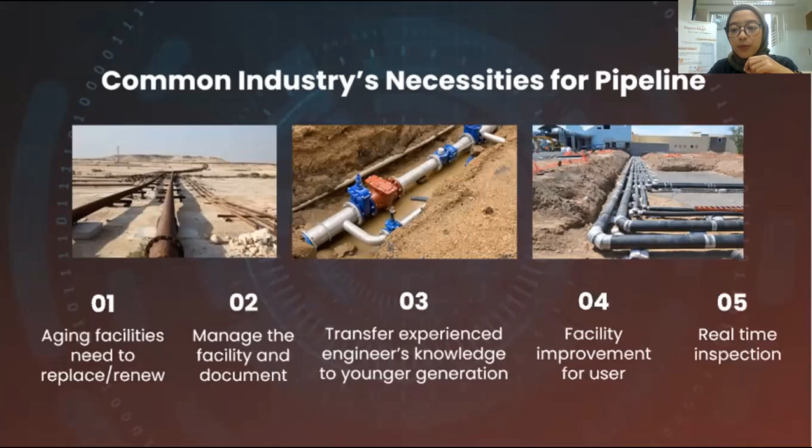The third one, there's regeneration for every company, of course. We need a platform that could make sure the experienced engineers' knowledge is well delivered to the younger generation. And then facility improvement for users. The last one is real-time inspection for mitigation and to avoid worse accidents.

Following up on the previous necessities and issues encountered by users, SuperMap provides four concepts as pipeline management solutions. GIS will not replace oil and gas software, never. But by trying to solve the issues that emerge using spatial approaches, we believe we can offer these solutions.

The first one is facility data management, emergency situation analysis, 2D and 3D integration, and the last one is pipe modeling and analysis.

And who can utilize this solution? As long as the industry has pipes to manage and analyze, they need this solution - such as the oil and gas industry, telecommunication, water supply, and many more. Now let's discuss one by one the solutions I mentioned before.

So the first one is facility data management. The data here means data that has spatial information, consisting of position, coordinate system, and attribute information. Tabular data is not really convenient for analysis, especially for spatial analysis. By mapping them and overlaying with an informative base map, we can achieve not only data management, but also insights into their distribution, scale, and relative position to each other. Moreover, visualizing them in 3D makes it way more convenient.

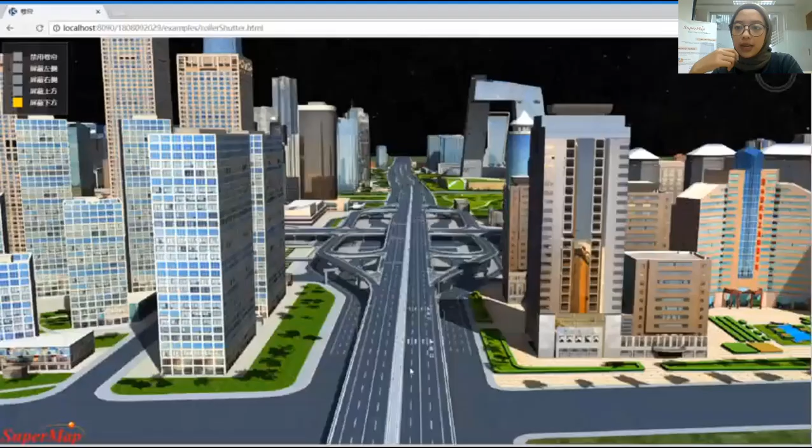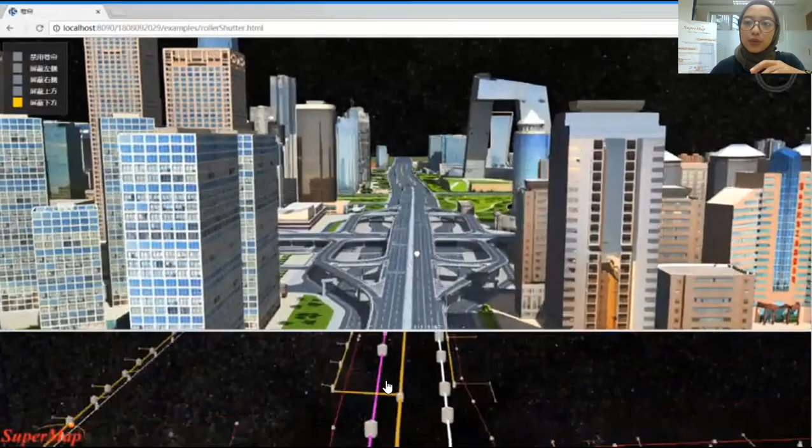This one shows more detail on the example of data integration. We are trying to bring 3D data from desktop application into web-based application, and also integrate the underground data and above-ground data together, as presented here. So we can know what objects are above the pipeline. Let's say later on, if we are going to build a new building, we can check first what pipes are located under the planned building area.

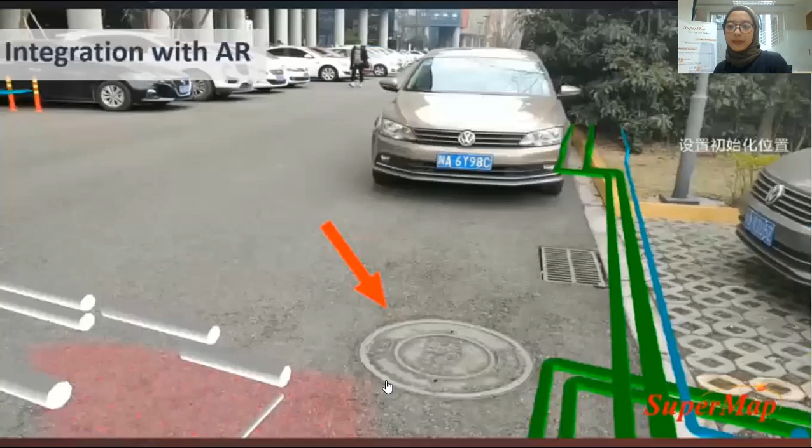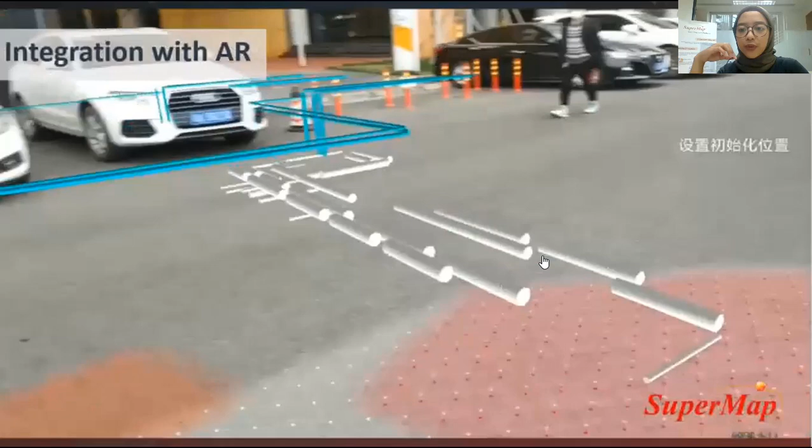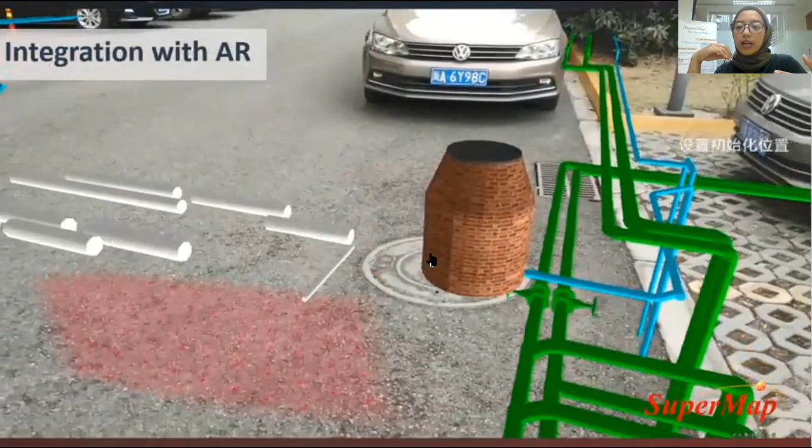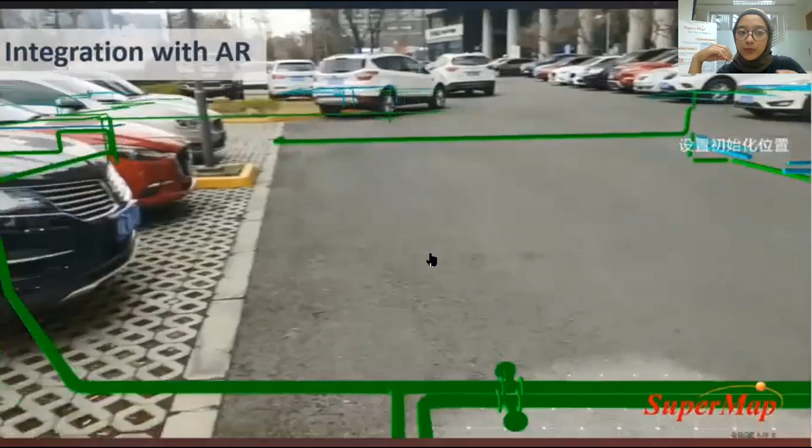Another thing is AR, or augmented reality, for a way better user experience. Pipes are mostly, or maybe all, located underground. Sometimes staff need to do an inspection for a certain pipe, but digging the soil to find it is not convenient and not effective. AR that overlays digital and real objects, as presented here, will allow you to know where the pipe is located. But we need to set the scale of each object so we can make sure the position and size of the object is similar, or quite similar, to the real object.

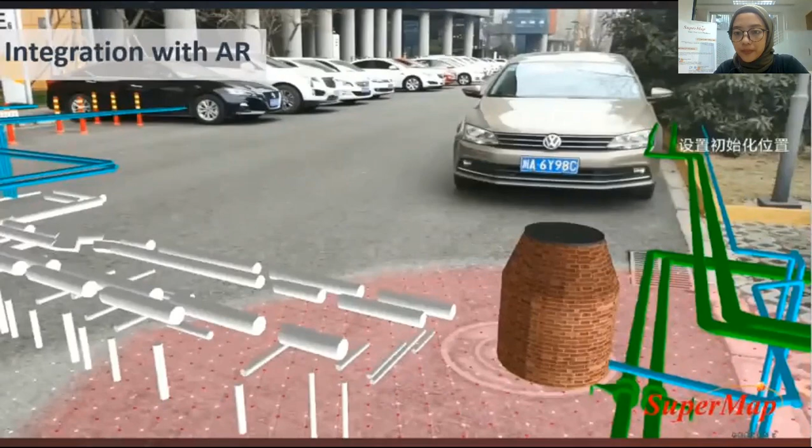So we have discussed facility data management, emergency situation analysis, and 2D and 3D integration in SuperMap pipeline management solution. For the last part, pipe modeling and analysis, I will show you a live demonstration on how to achieve this in SuperMap desktop application, or what we call SuperMap iDesktop.

And this is not limited to desktop - we can bring the analysis to web-based applications as well. So in case you may need to develop a new platform or application on another terminal, not desktop, you can bring the analysis and do further development to achieve that pipeline management or pipeline analysis application.

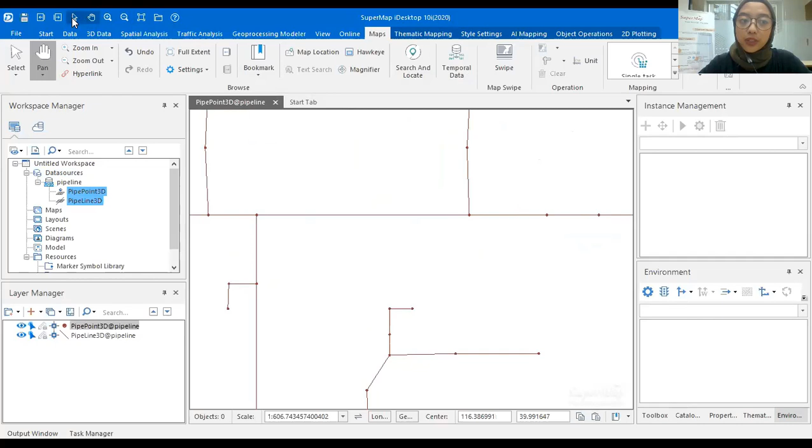So one line, or we call it one edge, such as this one, will have nodes at each end of the line. This node, and also this node, will be very useful for us to detect the flow or the direction of the pipeline. Later on we will analyze the network based on the direction of the pipeline.

So we need to construct a network first, otherwise we will not be able to do further analysis for the pipeline. In the beginning we need to create a new network data set from our data.

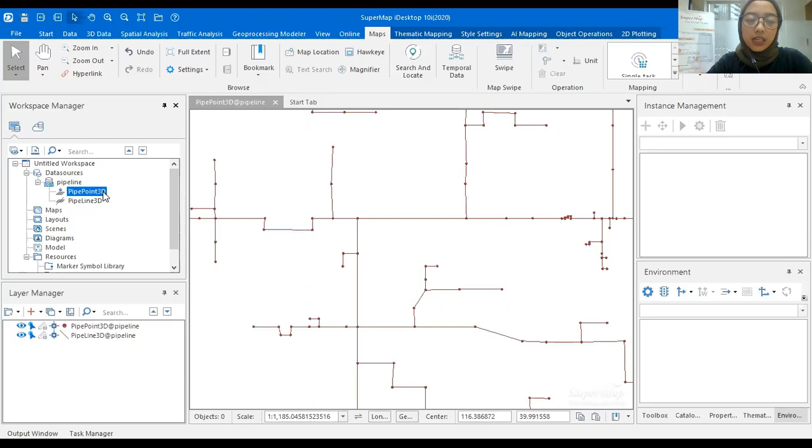Before that, I want to show you the attribute table of each data. For example, this PipePoint3D is for the valve, or the node data. It has a rotation field XYZ, then symbol ID, and also scale number XYZ.

This information will be very useful for us to style the valve, to style the node in the end. As you see here, the symbol ID has some numbers, right? Actually it corresponds with our library of pipe points.

Maybe I will show you here in the SuperMap resources. You can check the marker symbol library, go to 3D symbol, and here in the pipe points, every point symbol has a different ID from each other. This one has ID 54437, and this one is 54454.

So by taking advantage of the symbol ID information, the symbol ID field stored in the PipePoint3D, we can style the valve, we can change the style of the node referring to the symbol ID to make it look like this.

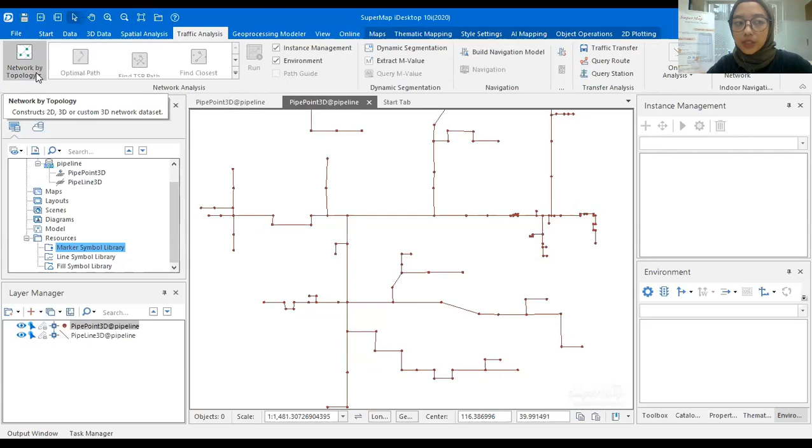Okay, first we can go to the spatial analysis, and there is a structure network tools. Sorry, it should be in the traffic analysis because we are going to create a 3D network. So there is a network by topology, and we can click in the structure 3D network.

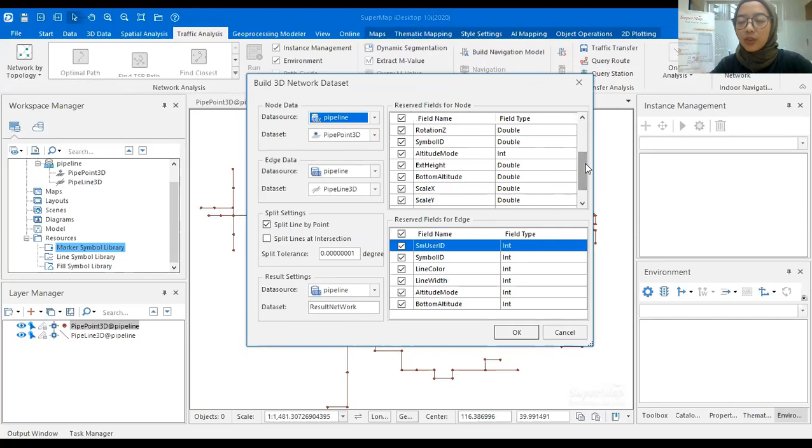Now you will be asked to define the node data and the edge data. In the node data, it should be PipePoint3D, and in the edge data it will be pipeline 3D as well. You can also change the reserved fields for both the node and the edge. If you have other requirements to store or reserve certain fields, you can do further settings there, and also change the directory path for the result and the default data set name, then click OK.

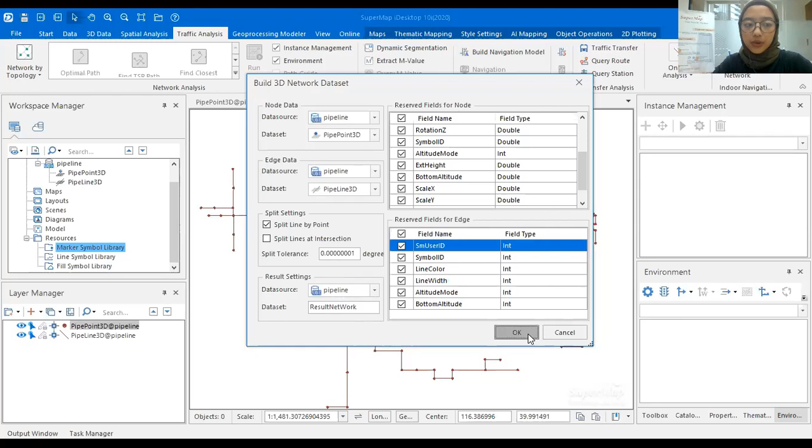As the process finishes, we get two different data sets. The first one is the line data set, and the second one is the node data set. So here I will open the data in this map.

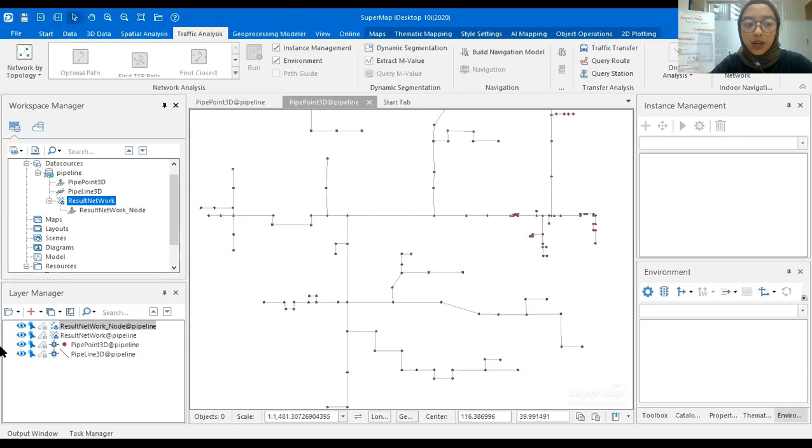Actually it will look very similar to our previous data that hasn't had the network dataset created yet. But the difference is if you check the attribute table, it will have two new fields, the SmFNode and the SmTNode. SMF node represents the from, and T stands for the to. So by utilizing these fields, the SMF node and SMT node, we can know the direction of the flow of the pipeline.

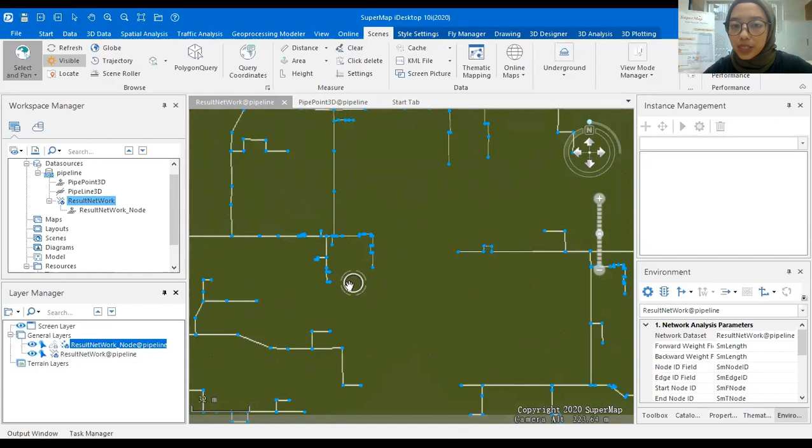Okay, next. Now I will open this data in a spherical scene. Okay, and this is how the data looks like. I will go back to the presentation again.

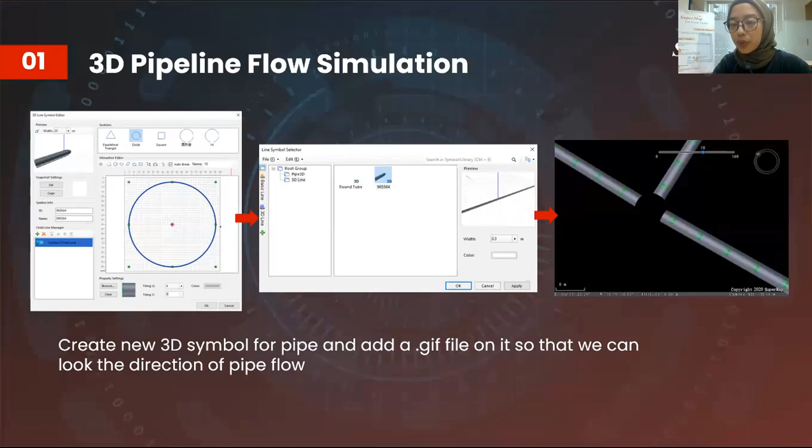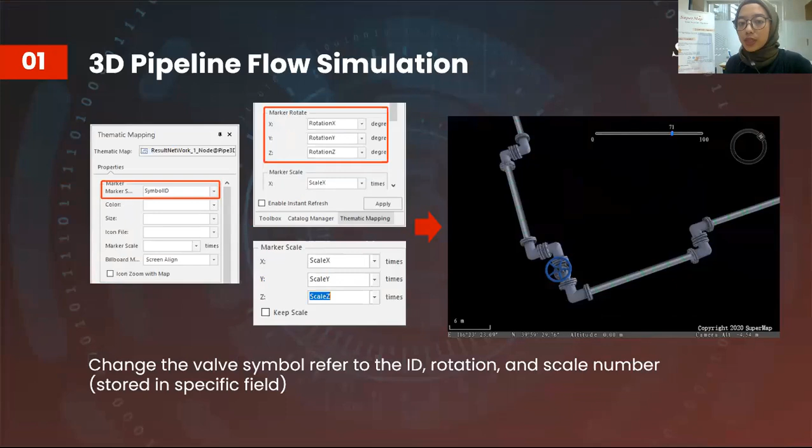So we will change the style of the pipeline. First we will change the style for the pipe by creating a new 3D symbol and adding a GIF file on it so we can know the direction of the symbol. We will also change the style, the symbol for the node or for the valve, based on the information already stored in the rotation field, the symbol ID field, and the scale field. The last result will look like this: we get the 3D symbol of our pipeline and also the 3D visualization for the valve, and we add a GIF file for the pipe so we can know the direction of the pipe.

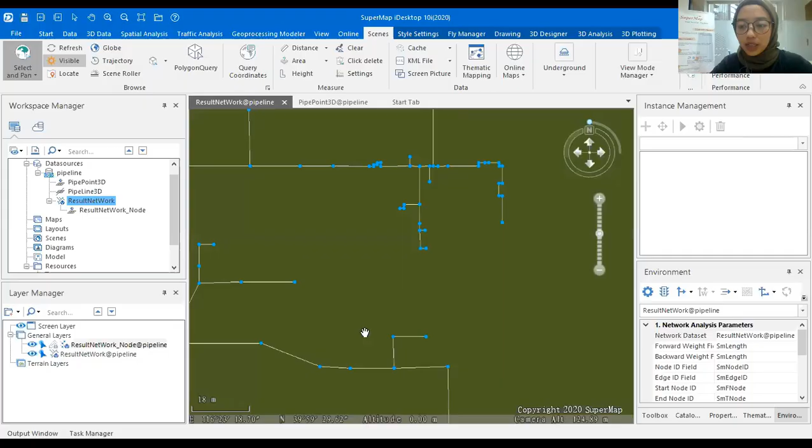How to achieve that: you can change the style of the pipe first. Right click on the pipe layer, the ResultNetWork layer style, and we will create a new symbol. In the interactive editor, you can choose the circle one and draw circles starting from the center of the area, and then it will look like this.

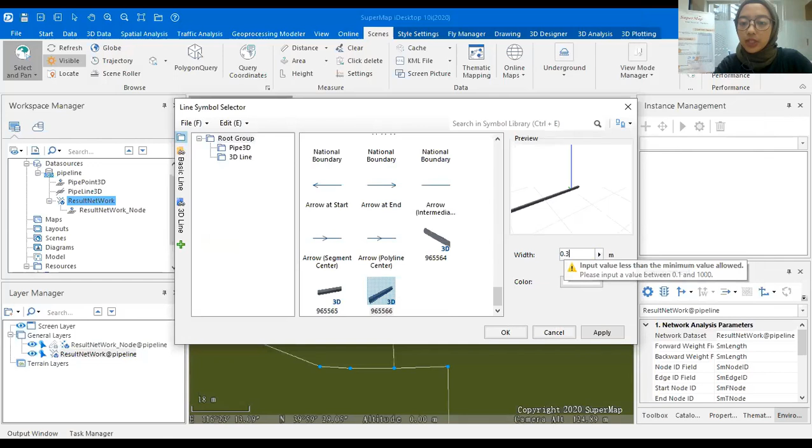Next we will add a GIF file. This GIF file has a green arrow illustration that will be very useful for us to know the direction of the pipeline, to know the flow of the pipeline. Then click OK, and it will be stored here. We can change the width into 0.3 and click OK.

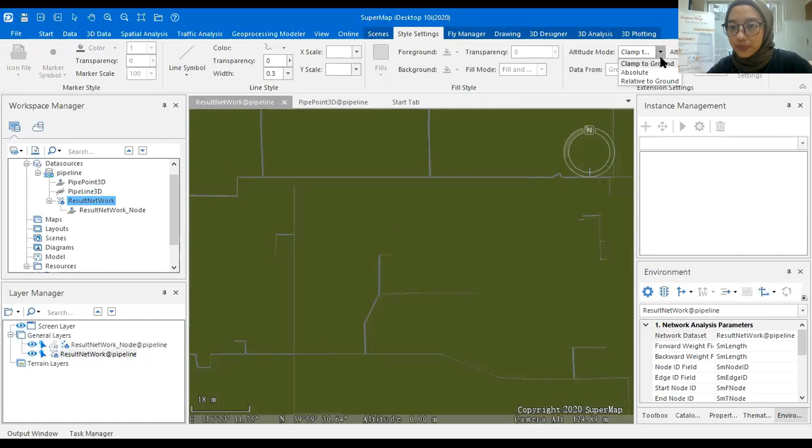Okay, and it will look like this. Now we change the altitude mode. We can change it into absolute and set the data from underground, and then we can turn on the underground mode into open, so that we will be able to change the transparency number.

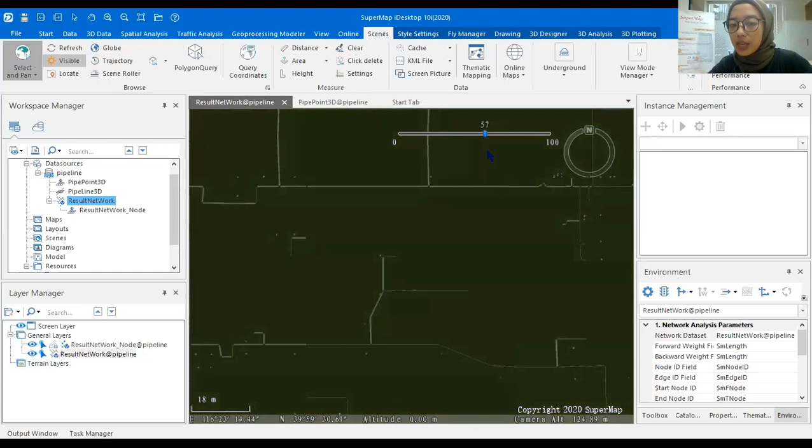If you don't change the transparency bar here, you will not be able to see any object underground. So you need to change the transparency first, so that you can see the object underground. Maybe we can set it to 80%, and this is how the data looks like.

So there's an elevation difference between this valve and this valve and this pipeline. That was because the data were located at different elevations, because for the valve, for the node, we haven't set the elevation yet.

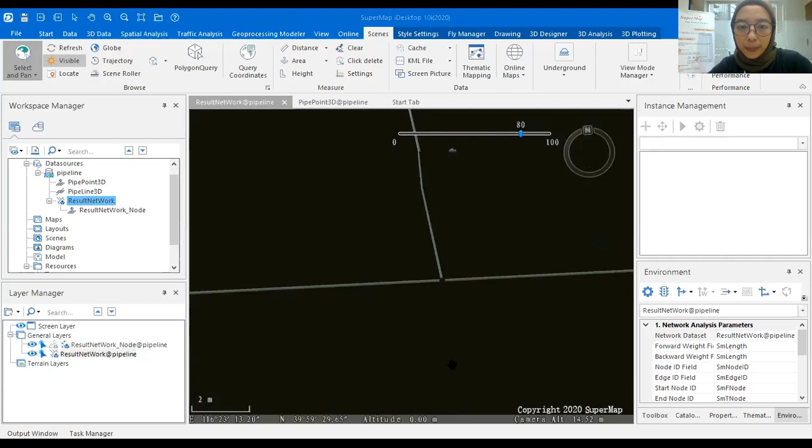Sorry, I think there is an issue regarding my voice, and I don't know if you heard it well, but I'm not sure, because I already set the microphone as microphone in at front panel, but it still gives me the echo.

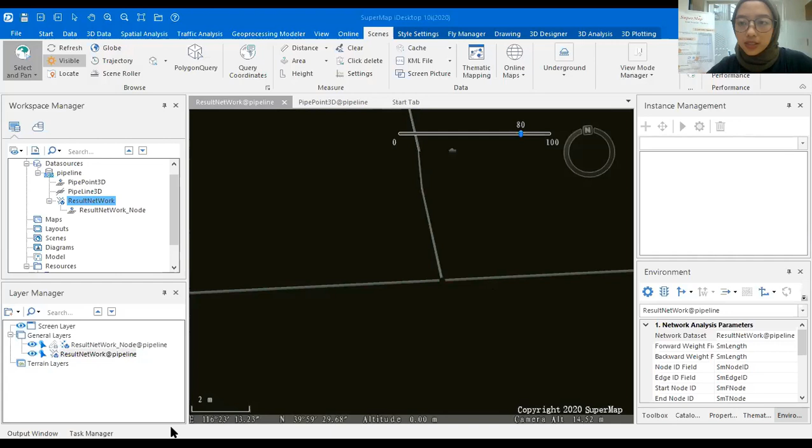That's okay, I think this one is better. Okay, I will continue the presentation.

Next we will change the style for the valve. As I told you before, it refers to the information of the symbol ID, the rotation, and also the scale.

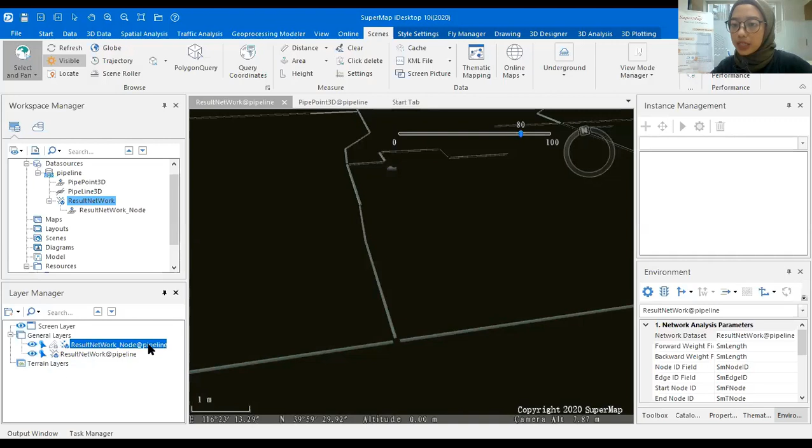To do so, we need to create a new thematic layer of our node layer. You can right click and create thematic map.

Choose the custom map and select the default. Click OK.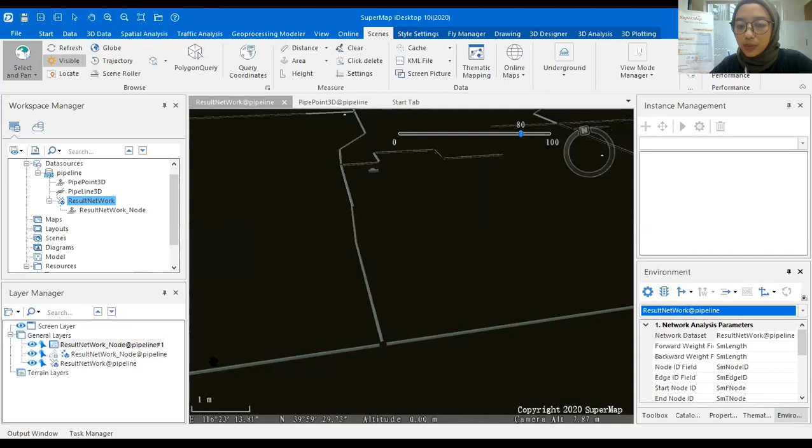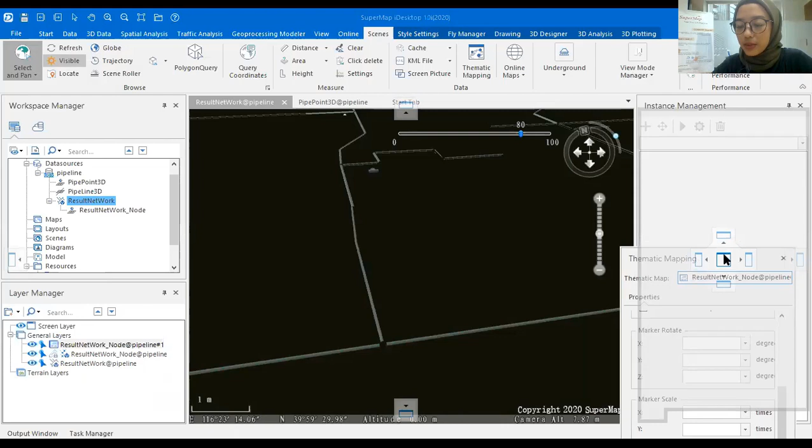Now we can right click in the thematic layer and go to modify thematic map, and you will get this window, the thematic mapping window.

Here we can define the symbol ID, the rotation value, and also the scale. In the marker symbol, you can select the symbol ID, and for the rotation, you can select rotation X, rotation Y, and rotation Z. In the marker scale, we can select scale X, scale Y, and scale Z.

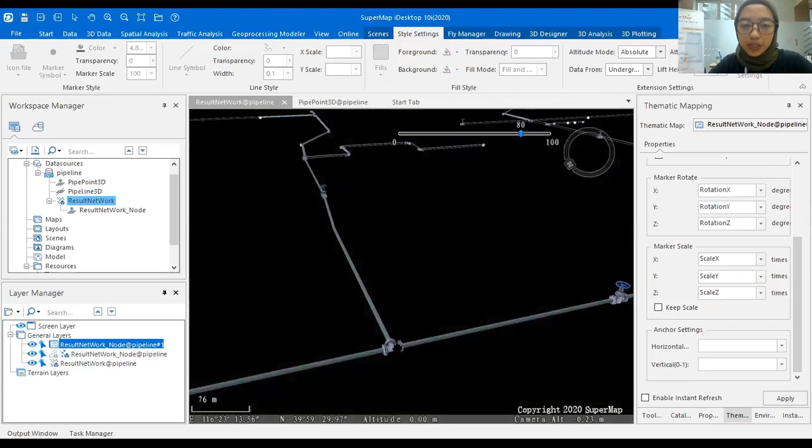Now click Apply and OK. Let's look at it - not yet as it should be. So we can change the elevation altitude mode into absolute and data from underground, so it will be located where it's supposed to be.

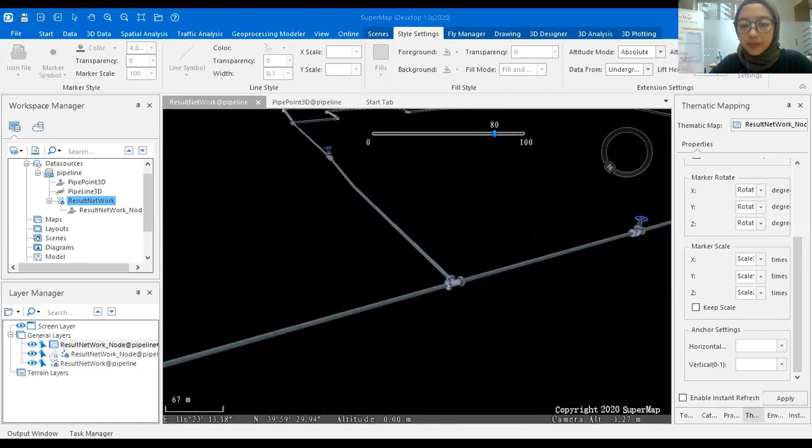Okay, now we go back to the presentation. So we have successfully tried to set a model for the data, change the symbol, create a 3D new symbol, and also give a flow illustration for the pipeline.

Next part is regarding the analysis. One of the analyses provided by SuperMap for pipeline is the single tracing element analysis. It performs the tracing analysis for a specified node or edge according to the network direction, and it provides four different analyses: the trace upstream, the trace downstream, the find source, and find sink.

Before we move to iDesktop again, I will give you a brief explanation first on each analysis. In trace upstream, it will look up all the upstream edges that flow into the specific node or edge.

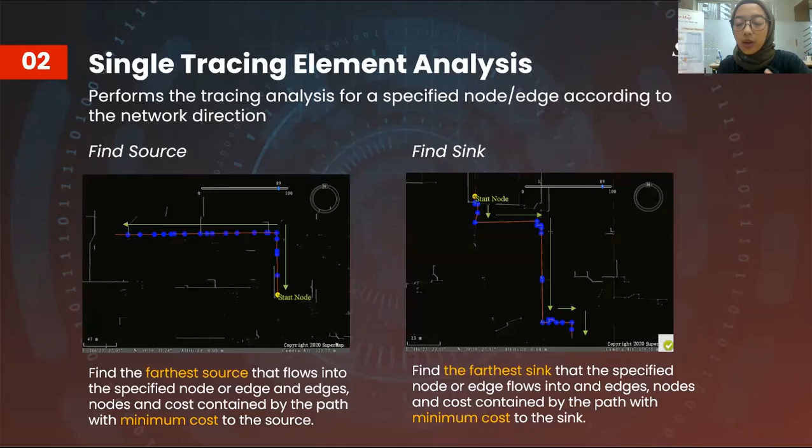But for find source and find sink, it will give you the farthest source with minimum cost. For today's tutorial, I will show you with the cost as the length. So find source and find sink give you the farthest sink or farthest source with minimum cost, while trace upstream and downstream give you the whole result - if you have more than one path, maybe two, three or more, it will give you the whole result.

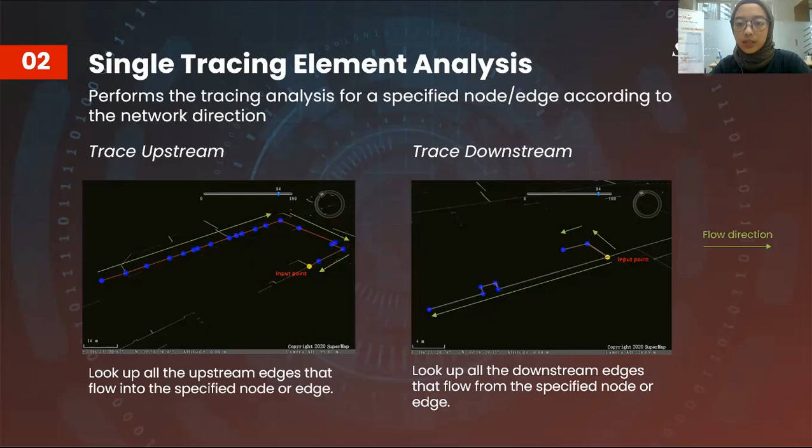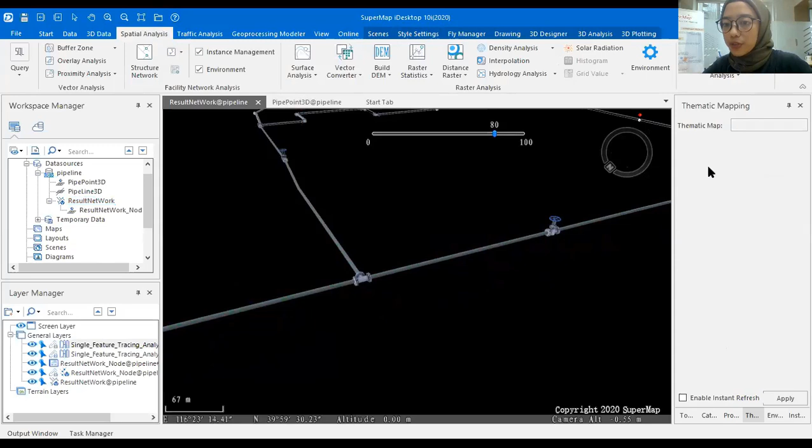Okay, now let's take a look at how the analysis is done in iDesktop. In spatial analysis, within the facility network analysis, you can find the single tracing element analysis. After you click on that, you will get two different windows: the environment and also instance management.

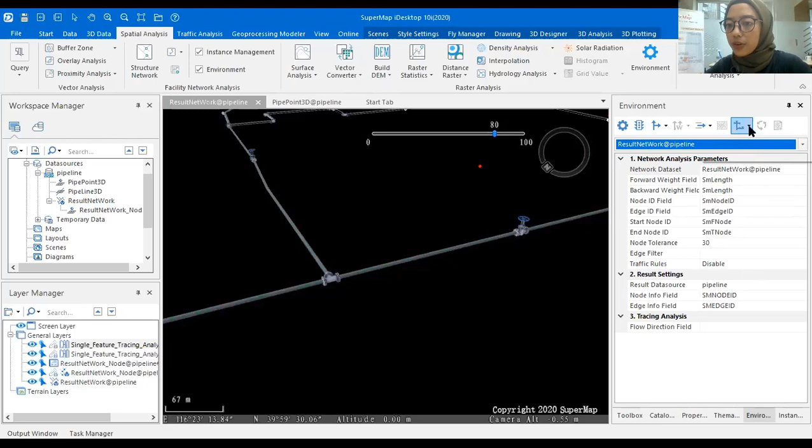In the environment, you can do some setting regarding the traffic rules, such as set the weight, set the node field ID, tolerance, or other things such as rules setting or the turntable - this will be useful for the last part, the burst analysis. For now, we will not try this setting.

So we will go directly to analyze the data. Here, if you check this button, you can first change the feature type. If you use node as the feature type, you need to put your points on your node.

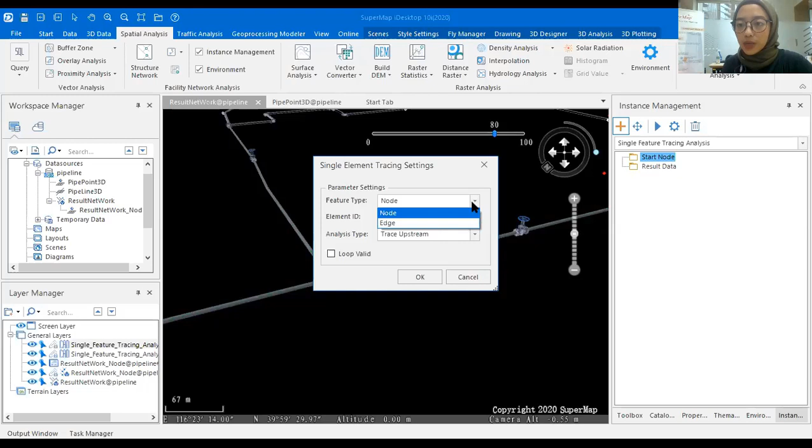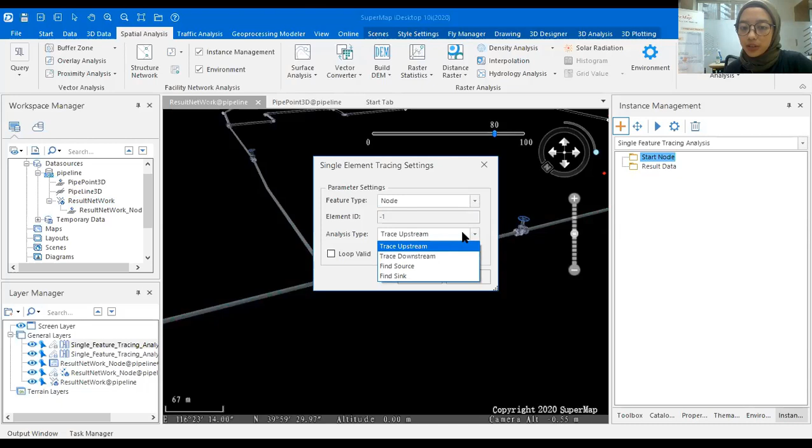Otherwise, if you put your points not on node but on edge, the software will automatically move your points into the closest node. If you use edge, you need to select the edge you want to analyze. But for today, we will use node as the feature type, and in the analysis type we can select either trace upstream, trace downstream, find the source, or find the sink.

In the beginning I will use the trace upstream. Click OK, and your mouse will change into a plus symbol. Now let's select one node, say this one, and click execute.

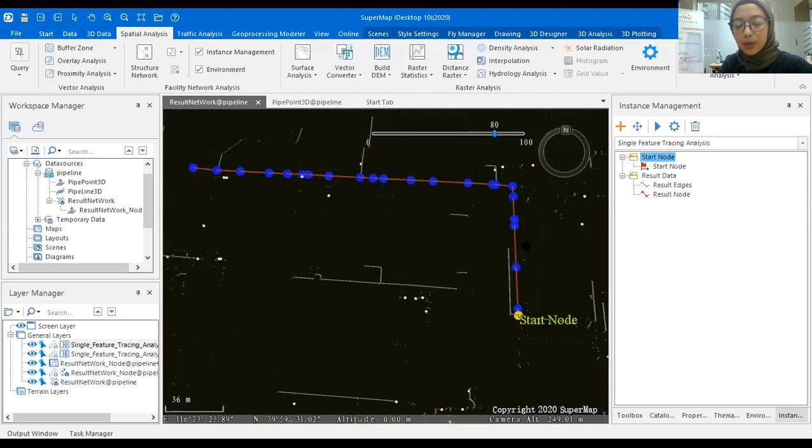Now let's take a look if we analyze the trace downstream. Click execute, and it will give you this result. So this is our point, the yellow one, and it will go to here, here, to here, and to here.

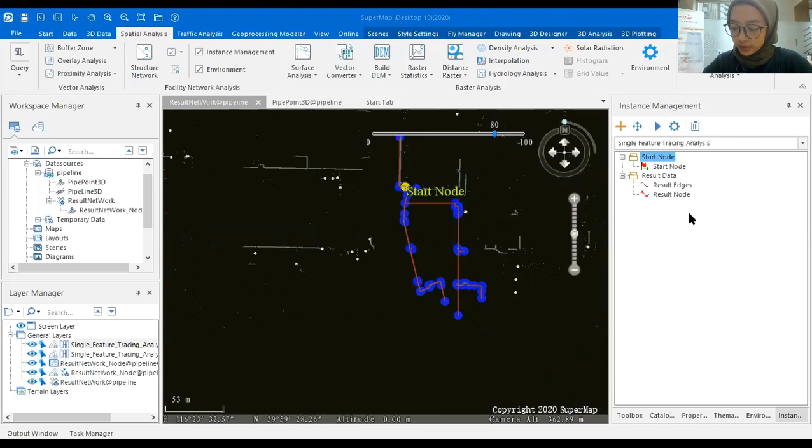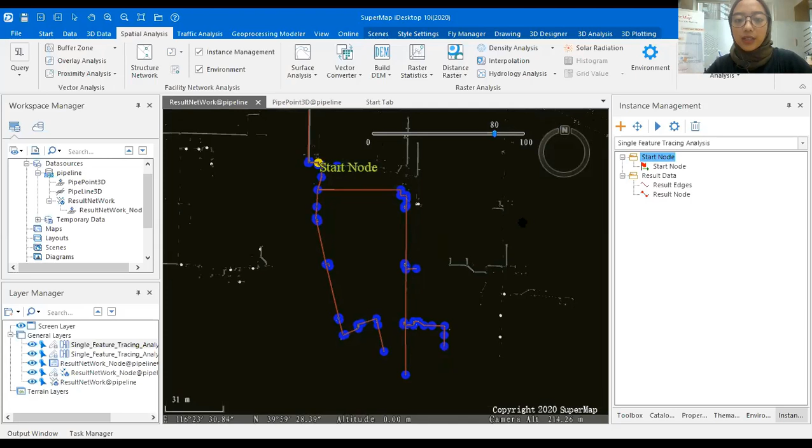Okay. So, okay, this is how the result... sorry, previously I had an internet issue, but I already solved it. Now I'm turning my microphone back on. Okay.

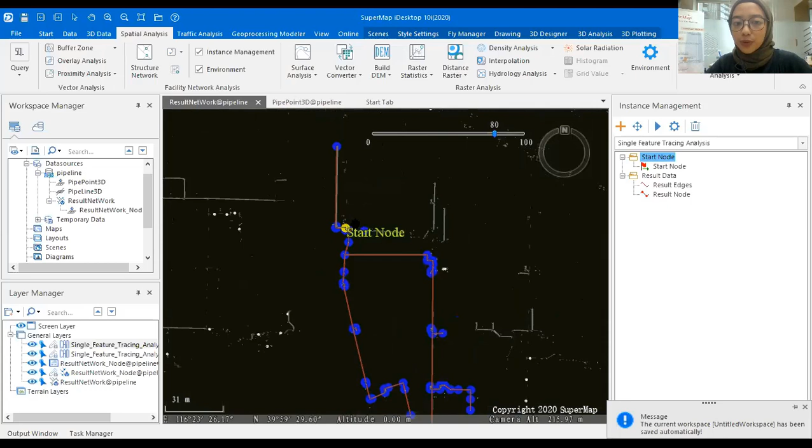I will repeat my last part. So this is our point, our selected point, and it will keep the flow from this point into this pipe. Okay, now we can change to another analysis.

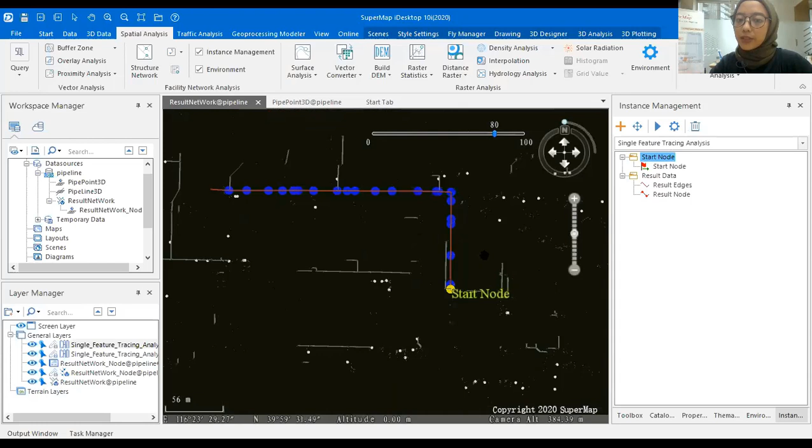Find the source is quite similar to the upstream analysis, but it will only give you one path, the one with the minimum cost, such as this one. Because this point only has one source, the result will be similar to the upstream analysis. And now we use the find sink.

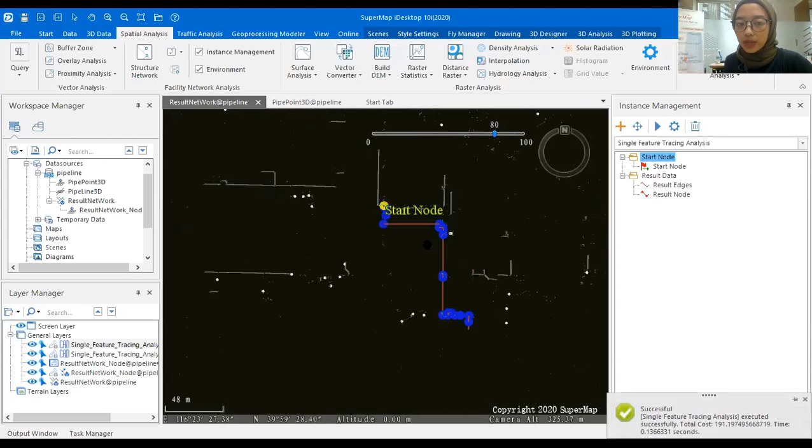Previously, if you remember the result of the downstream analysis, you got more than one result, more than one path. But for this, since finding the sink will only give you the minimum cost, the farthest and minimum cost path, the cost for this case is the length, because in this environment we already set the cost or weight as length. So that's why the result is based on the length cost.

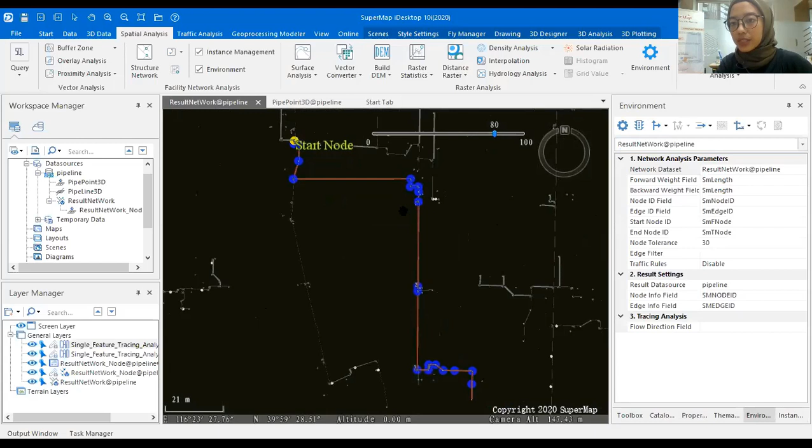Okay, now we go to another analysis. The next part is the critical facility analysis. This function is used to find the critical upstream or downstream facility nodes closest to a specific node or edge, as well as the downstream edge influence.

This will be very useful in case you have a burst point and you want to know which is the source of this burst. By using the upstream analysis, you can find the source fault of the specific burst point, for example, and trace the affected pipe. For the downstream, you will not get the source fault result, but only the information of the affected pipe. So the main difference is only for the source fault — in the upstream you get the source fault information too, but in the downstream you only get the affected pipeline.

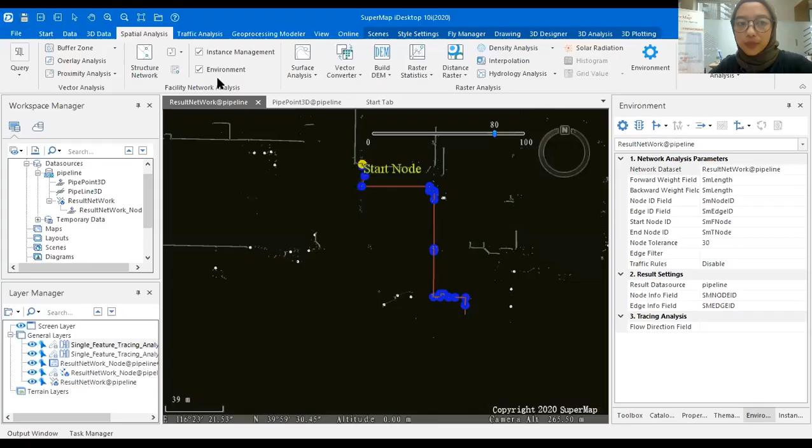Okay, now maybe we can directly try the critical facility analysis. Here you can change whether to do the upstream facility or the downstream facility analysis. Click OK. See this here.

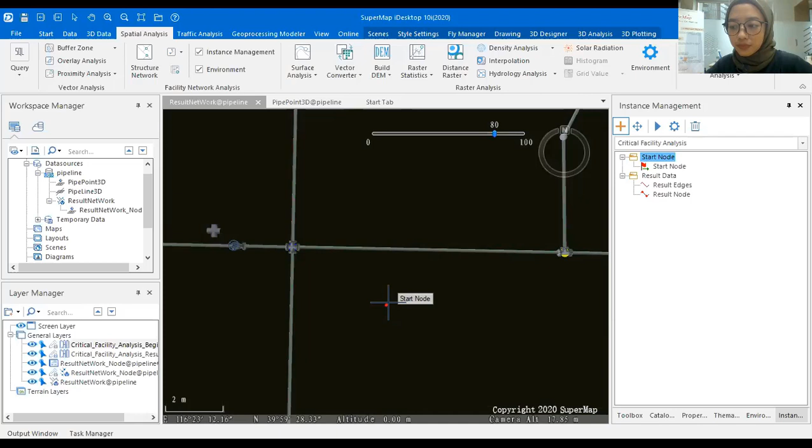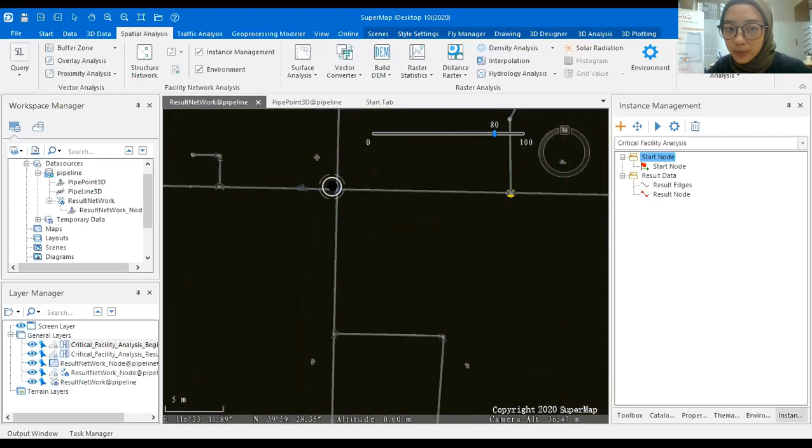So we define our points here, and in the critical upstream facility, it will detect our points, and it will detect the source. The source should be here, the blue one, and the red line represents the affected area. If we do the downstream facility analysis, it will only show you the affected area, this one. While in the upstream, it will give you the source and the trace before the source, such as this one.

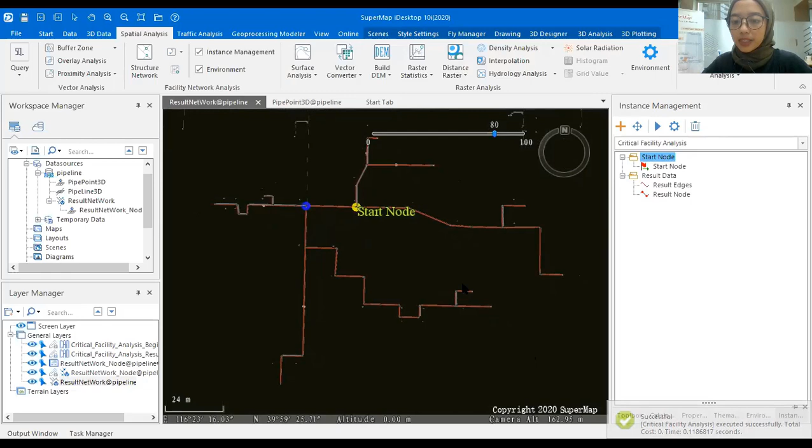Okay, now the last part. In the critical element analysis, once we know which valve acts as the source, we can then do some prevention, such as closing the valve, so that it can reduce the risk of the flow affecting the selected pipeline.

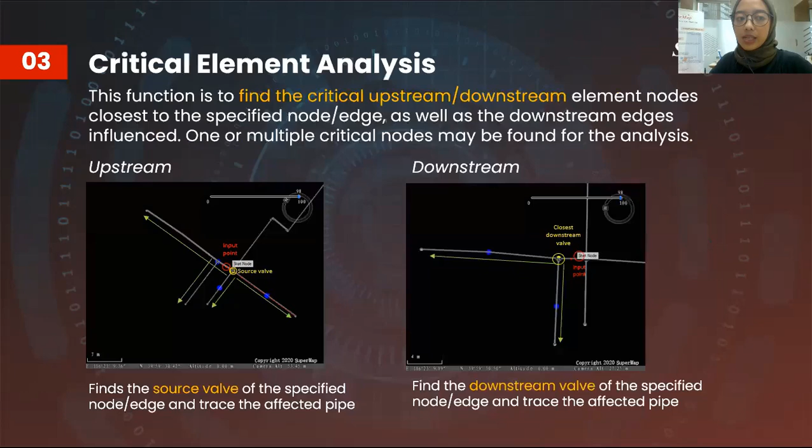And the last one is the burst analysis. This function is used to find the valve that is closest to the burst incident point from the upstream. The analysis itself is quite similar to the previous ones, such as the critical elements analysis and single tracing element analysis. We can find this analysis as well in the burst analysis.

But one thing different is that in the burst analysis, we can do styling easier. We can directly do some setting to define the pipeline information that has correlation for the styling, such as the marker symbol, the scale, the rotation value, so that it will directly give you the pipe 3D model, and after that do further analysis for that.

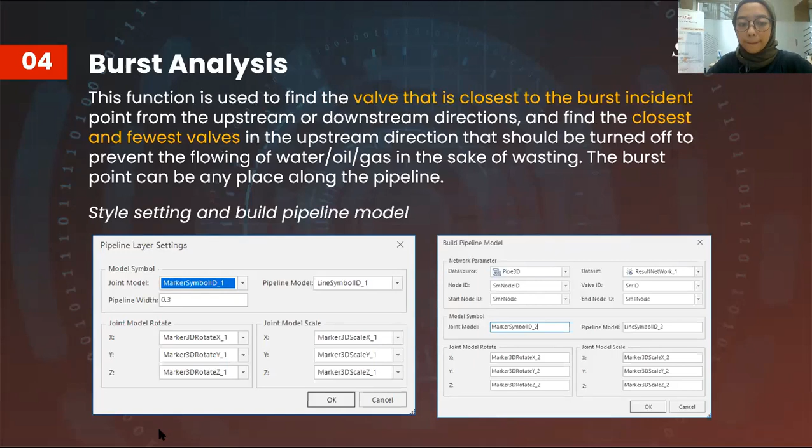The analyses provided are the closest valve, the critical downstream facility for burst point, and downstream facility closest to valve. Now I will go back to the iDesktop.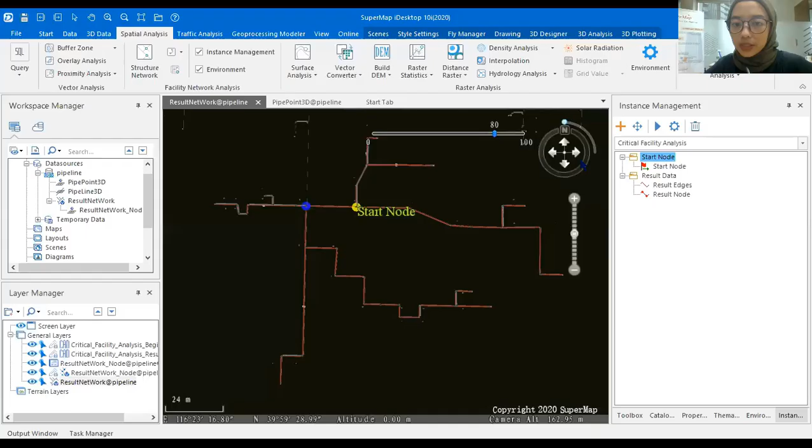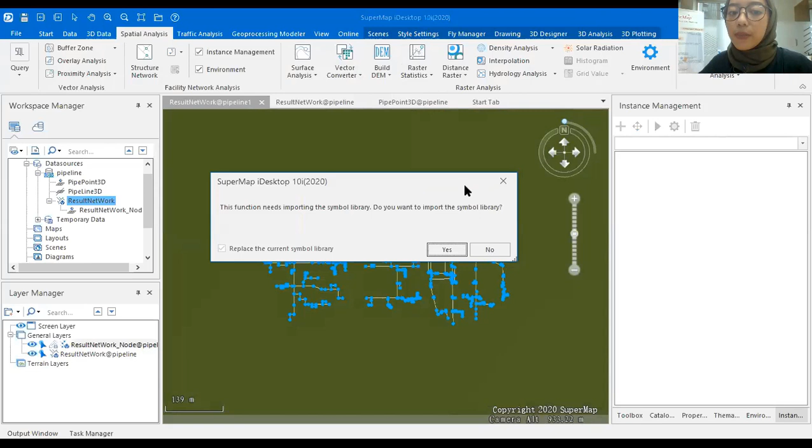I will open my data in a new spherical scene again. It will look the same as before, but in the spatial analysis, I will do the pipe burst, and there's a prompt message that this function needs importing the symbol library.

So yeah, of course we need to click yes because we are going to style the valve later on. It will automatically set your data to be underground, and because it hasn't been styled yet, you need to define the information first.

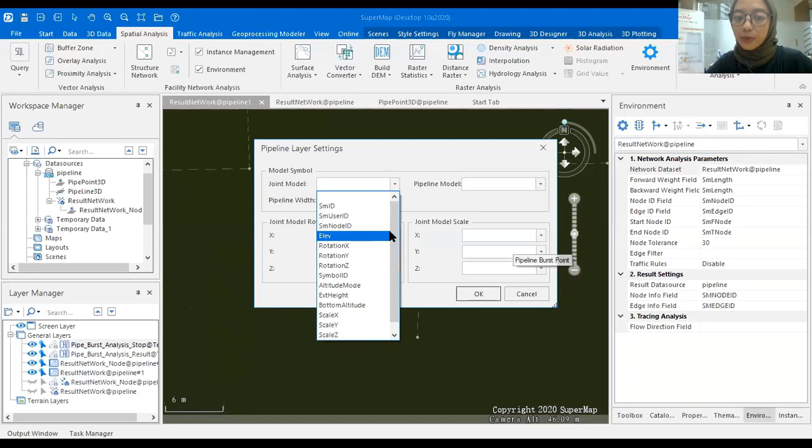In the environments, you can set the pipeline layer setting. The joint model should be the symbol ID. We need to set the pipeline model first, where we define the node ID, the edge ID, the start node, the end node that is stored in the SMF and SMT node, and then the symbol, the marker symbol, the scale, and also rotation value.

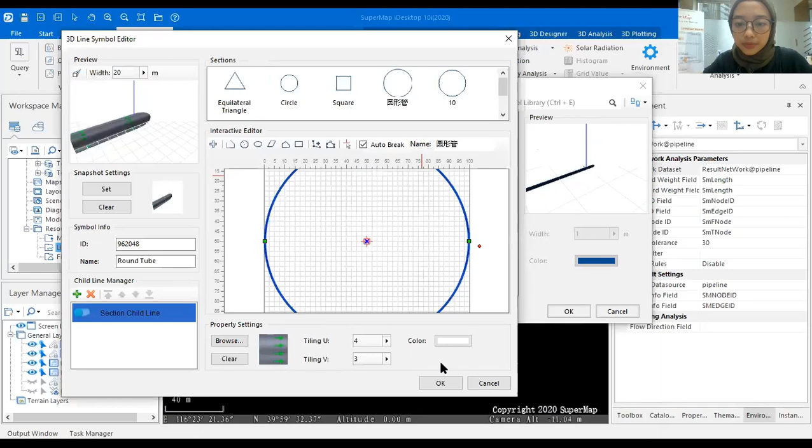Click OK, and it will update your attribute table, and this will be the result. Maybe we can change some setting on it first. In the 3D line, it's actually using this symbol, so we can change it by editing the symbol, and do a refresh.

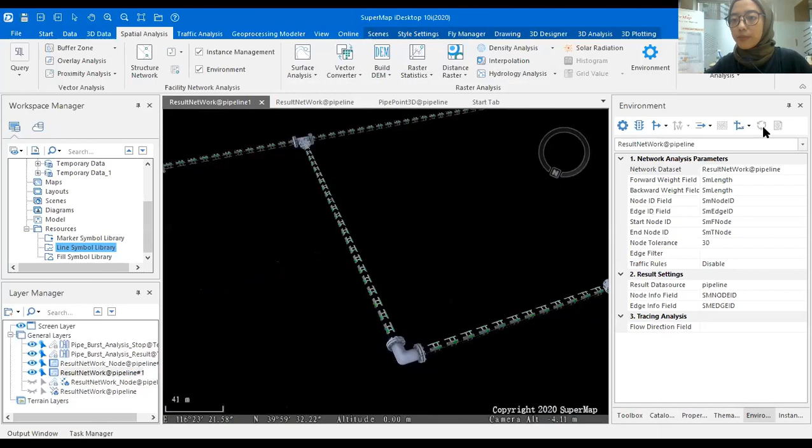Okay, I think that's no problem, so we can analyze further now. After you successfully build the pipeline, it will change the style of your pipe because you have set some parameters here during the pipeline building modeling.

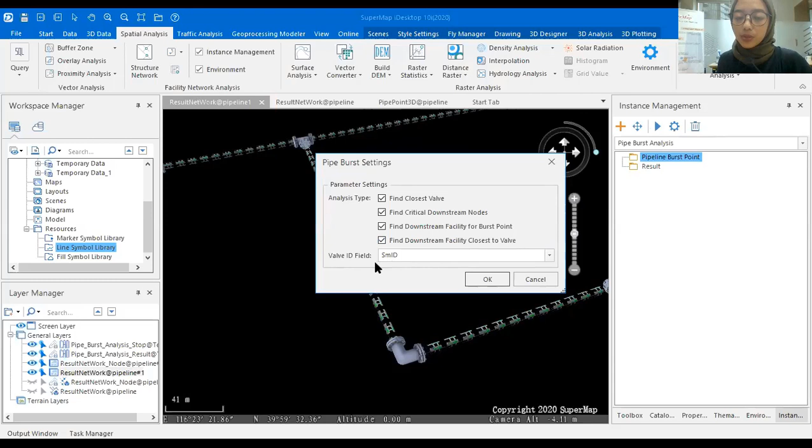Now in the instance management, it's just like before. We can select some analysis we are going to run, whether to find the closest valve, the critical downstream nodes, the downstream facility for burst point, or the downstream facility closest to valve. Click OK, and don't forget to define the valve ID field, otherwise you will not be able to achieve the result. Click OK.

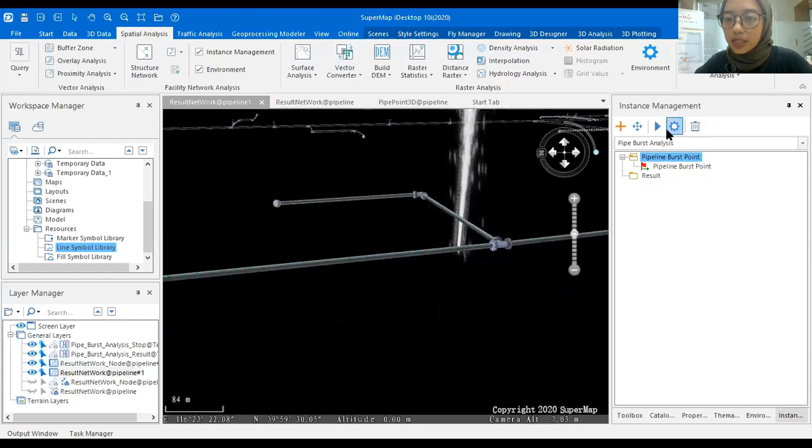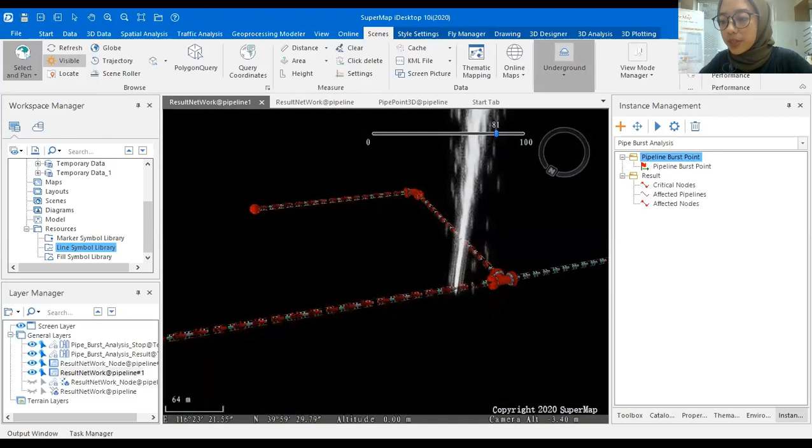I think we need to change the transparency to make it more convenient. So in this burst point, the source is this valve, and it will affect this part, and also this part of the pipeline.

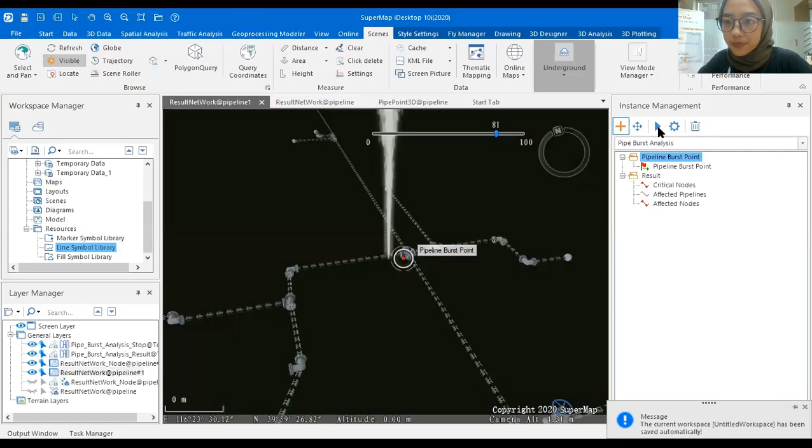Now let's try another point. See here. So the source will be this one, and the rest are the affected pipeline.

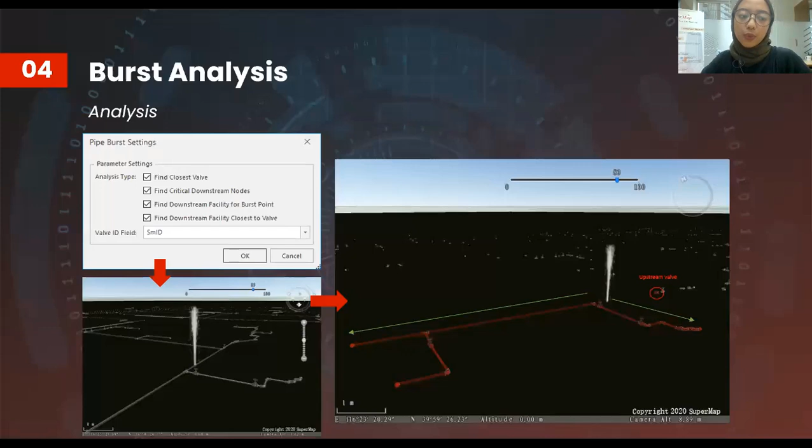So we have tried the whole analysis for today, including the single tracing analysis, the critical element, the pipe burst analysis, and also tried to symbolize our 3D point and the 3D line pipeline, so we will be able to know way more, have more experience in knowing how it will look like in real life because we tried to represent them in 3D.